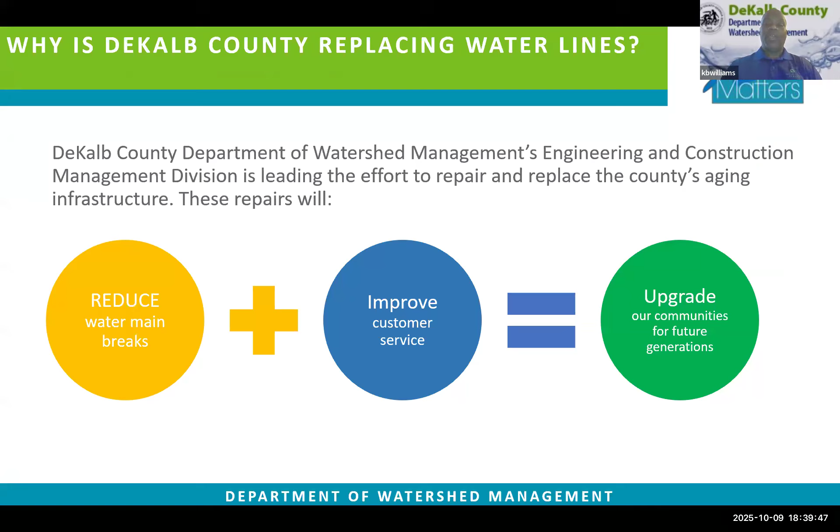So why are we replacing them? This reduces breaks, improves customer service, gives you better water pressure. And again, the pipes are aged. They've been there since the water system was established, and it's now time for them to be replaced. You already changed the slide on me, so.

All right, so to bring you this, we use a combination of contractors and consultants. We have AECOM, we have Ruby Collins, which is a contractor. These are the people that actually design, assist us in designing this, and provide construction for this project.

Next slide, please. All right, I'm going to go ahead and move out of here, and I'm going to introduce Ms. Cassandra Marshall, who's the Assistant Director for Watershed Management CIP. So without further ado, I bring you Ms. Cassandra Marshall. Ms. Marshall, the floor is yours.

Thank you, Kerry. Good evening, everybody. Again, my name is Cassandra Marshall. I am the Assistant Director of the Watershed Management CIP. My duties include overseeing the Watershed Management $4.27 billion capital improvement program and the construction management staff. Next slide.

The problem is primarily due to the infrastructure simply being aged. It was installed in the 1950s and 1960s. In this area, the county has been faced with over 85 water main breaks from 1989 to 2024. The pipe material in this area is primarily old tuberculated cast iron pipe and cement pipe. The lifespan for this pipe is 70 plus years, and as the number of pipe failures increases with time, it's a good indicator that the pipe needs to be replaced.

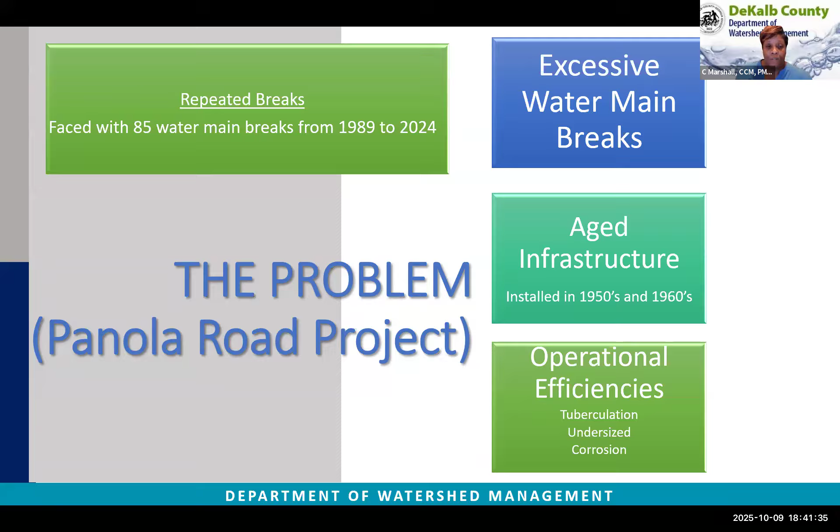In 2024, the Board of Commissioners approved a new CIP for $4.27 billion for projects to be completed from 2025 to 2034. So what is a capital improvement project? It's a project that helps maintain or improve an asset. It can either be new construction or replacement of an existing structure. The Panola Water Main Replacement Project is an $18.3 million project included in that plan.

My team, the CIP team, is responsible for executing the work and getting the work done. We oversee the contractor and provide construction management services. Next up, you will also hear from the DWM Construction Project Manager, Mr. Bobby Kilpatrick. Mr. Kilpatrick has over 20 years of construction experience, and along with in-house staff, we are also supported by consultant firms who help with inspection services.

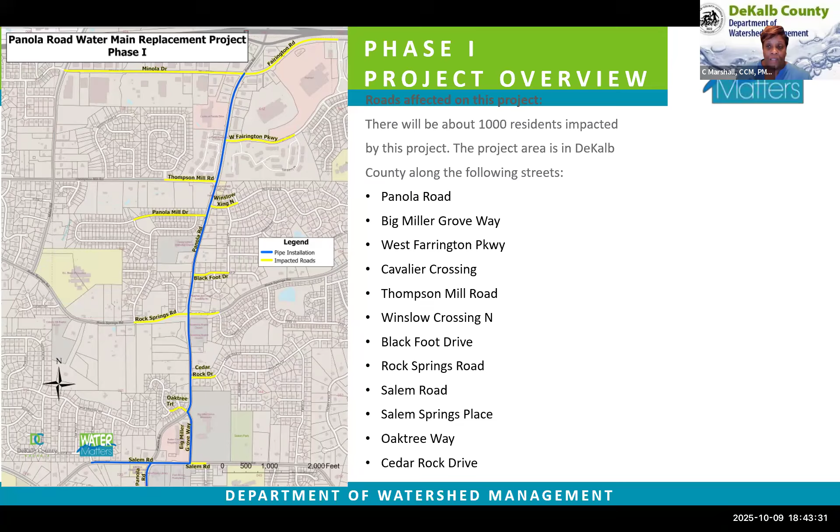The scope for phase one includes the installation of nearly 1,900 linear feet of new 8-inch ductile iron pipe and 9,500 linear feet of 12-inch ductile iron pipe. This includes service lines, hydrants, valves, pavement restoration, and water meters to grade. The trench will be milled and resurfaced once the new water main installation is complete. The existing 6-inch water main will be abandoned in place and filled with non-shrink grout. No more than 1,000 linear feet of trench will be open at one time and must be covered and backfilled daily.

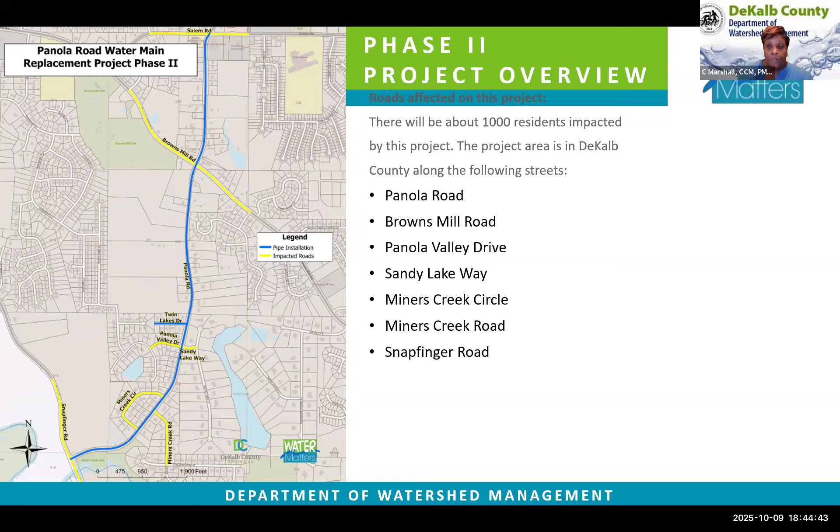The project scope for phase two includes the installation of nearly 1,100 linear feet of 8-inch DIP and 10,300 linear feet of 12-inch ductile iron pipe. Again, this also includes the service line to the meters, hydrants, valves, pavement restoration, and water meter boxes to grade. The trench will be milled and resurfaced once the new water main installation is complete, and the existing pipe will be abandoned in place and filled with grout.

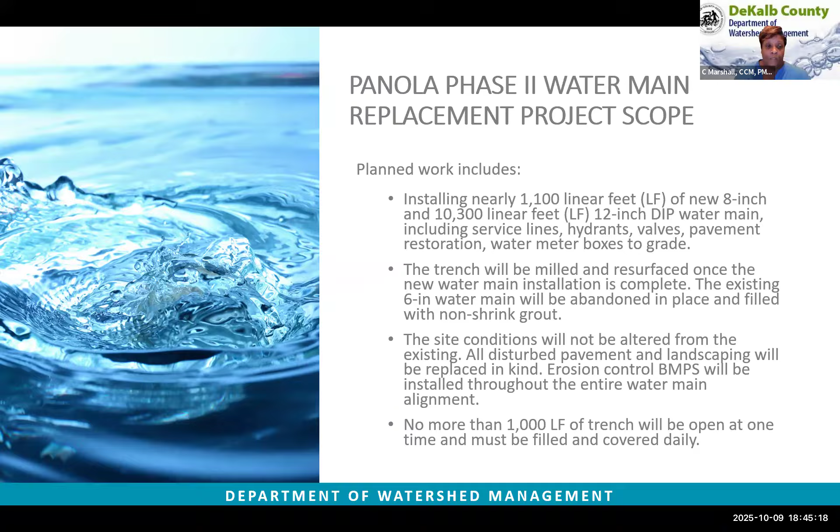Good evening, everyone. As Ms. Marshall just stated, I am Bobby Kilpatrick, the construction manager on this project.

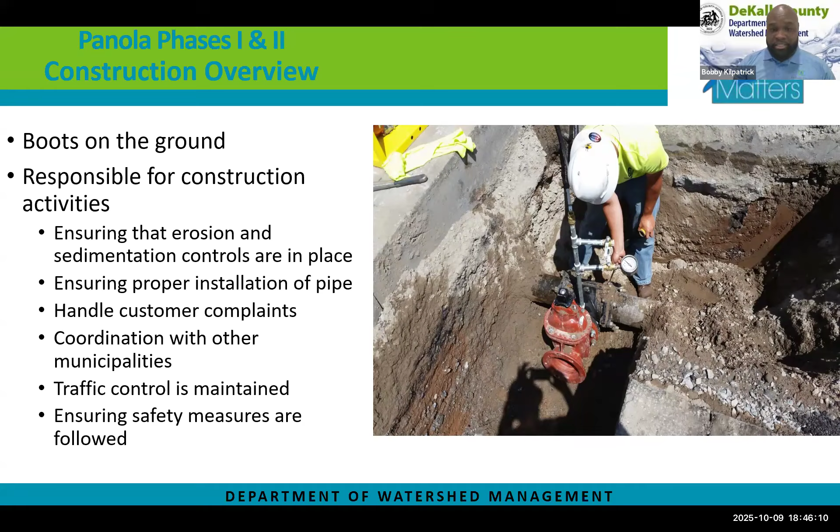This is where we get our boots on the ground. This will be the construction overview. The responsibilities for construction activities will ensure that erosion and sedimentation controls are in place, ensuring proper installation of pipe. We will handle customer complaints, coordination with municipalities, traffic control, making sure traffic control is maintained, and ensuring safety measures are followed daily.

The method of construction that we will use is an open cut method, which consists of cutting the asphalt, digging the trench, and installing the new water line. Also backfilling the trench and replacing the asphalt.

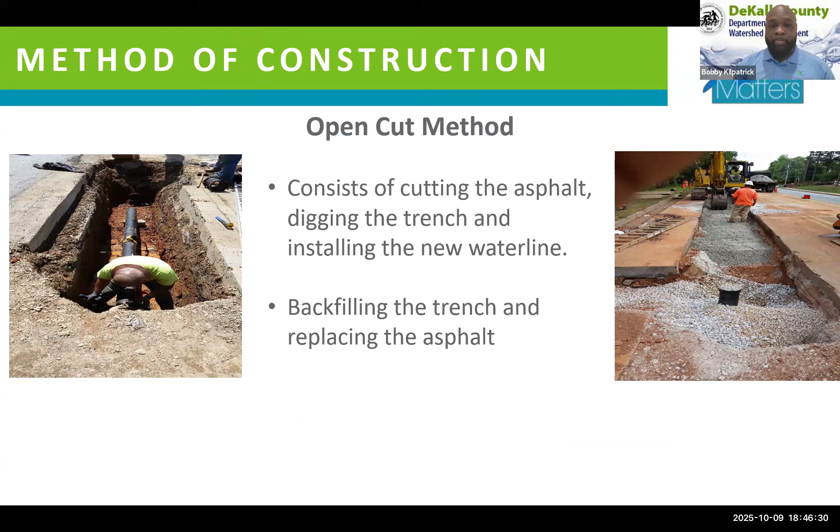Project duration will be a year. As you know, the community notices went out on October 3rd. Tonight, October 9th, is our community meeting. Mobilization will take place on Monday the 13th. Construction will actually start on October 20th, and final restoration and paving will start somewhere around August 2026. Construction would end somewhere around October 2026.

We sent out notices for phase 1 and phase 2 on October 3rd. This presentation tonight covers both phases. Mobilization for a second crew will begin in January 2026, and construction will start in February 2026 with final restoration and paving starting around October 2026. Construction for phase two will end somewhere around December 2026.

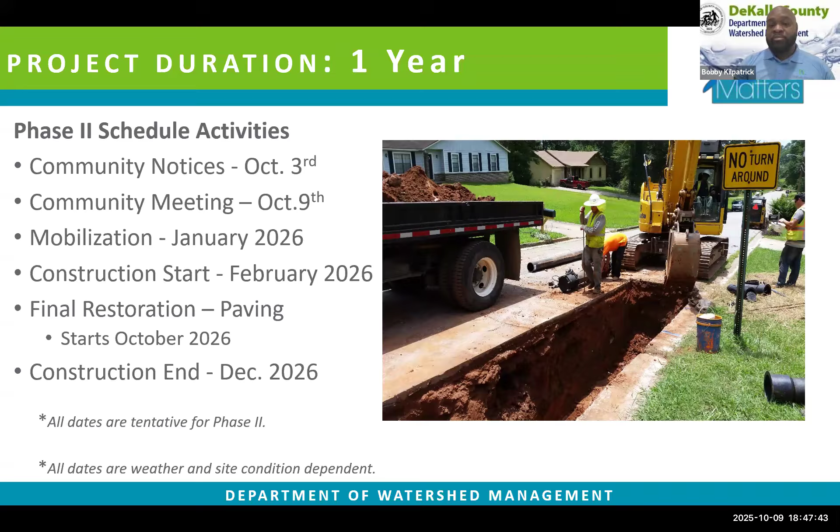As you look to your left, you will see the open trench cut topped off with GAB. And if you look to the right, you'll see similar to what we'll be finishing off with once we complete the paving.

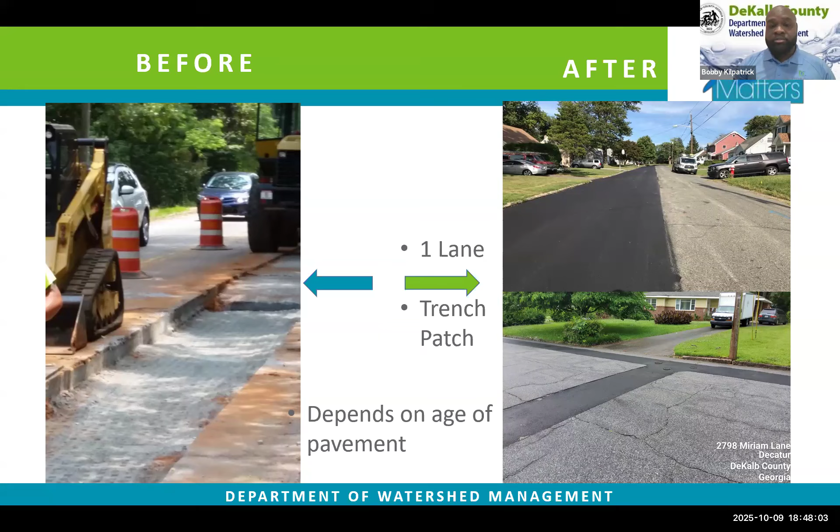I will give you a little bit of background on what the community should be aware of. Of course, everyone hates construction, but we want the infrastructure to be replaced. It's for the better interest of everybody, the community, and watershed management. However, unfortunately, what comes with the construction is the inconveniences which the county wants to try to minimize.

You're going to see a lot of construction traffic, both foot and vehicles, from construction deliveries, construction parking, and heavy equipment along the roadways. For safety and security, there's going to be increased noise from the backup alarms on the machinery, and the asphalt saw cutting is going to generate a lot of noise.

As a security and safety measure, we will delineate construction zones so you can clearly see where the contractor is working, and he will guide you throughout the construction zone. County contractors and employees will have a county-issued badge.

Our typical work hours will be from 7 a.m. to 7 p.m.

Coordination on specific streets affected during this construction will happen from the contractor and the outreach team. Also, residents will always have access to their driveways during construction.

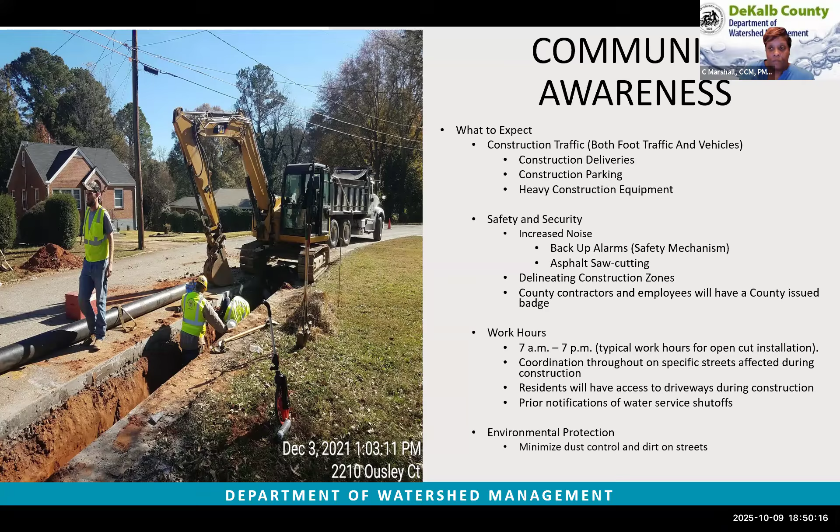Next slide. Next slide. It went too far. One more slide back. It's not there. Okay, then that's it right there. That's what I'm trying to get to.

All right, another thing with community awareness, as I previously stated, the contractor will provide traffic control by means of flaggers, cops if necessary, to get residents through the construction zone.

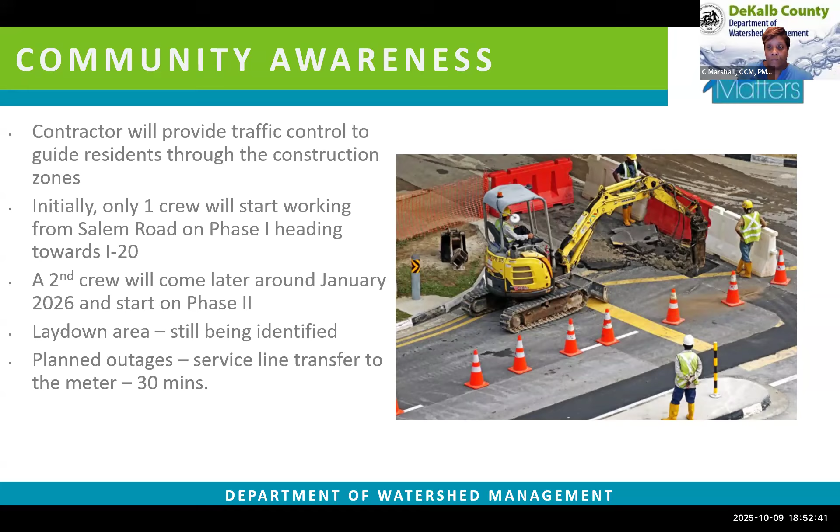All right, you will now hear from Miss Angelita Streeter about public communications updates.

Good evening, everyone. My name is Angelita Streeter, and I am the Public Outreach Specialist assigned to this project. Tonight, I'll share with you the methods DWM will use to communicate with you about this project. But before I do that, I want to briefly recap what has occurred so far within the community.

Our outreach team has engaged with residents in high-impact areas. Our construction and engineering team has also worked with residents to obtain right-of-entry access to their properties as well.

We will also use email to communicate with you. If you have not done so already, please take a moment to provide your email address in the chat so that we can capture that information for future use.

These are touch points we will use to communicate. First, we have the project hotline, which includes a 1-800 number and email address.